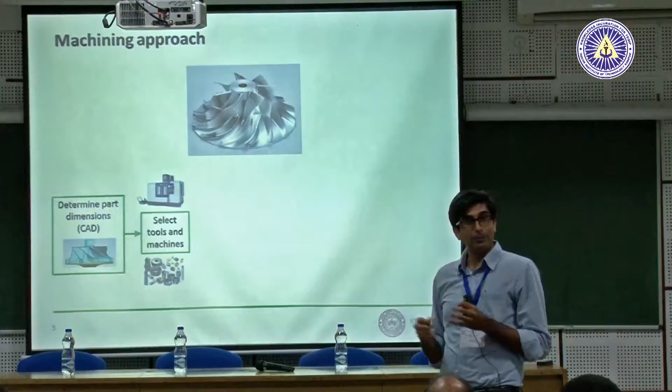Typically you start with a CAD model of this geometry that you want to build. Depending on that CAD model, and depending on what kind of operations you want to perform, you'll select tools. It might be drilling, boring, milling, and so on. In milling you might have tens of tools, so you select those kinds of tools.

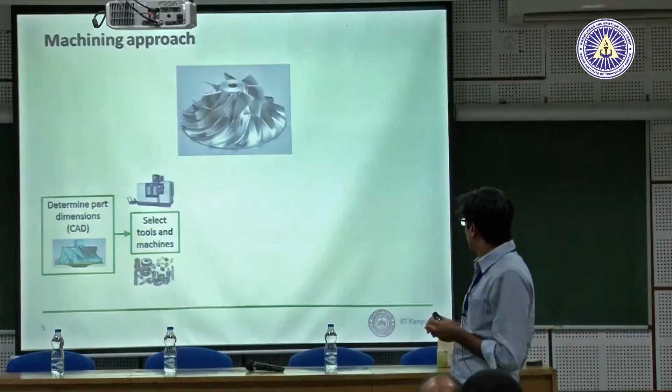Depending on the size of the object you want to make, you'll select a machine. Once you've done tool and machine selection, you'll take it to the CAM environment, the computer aided manufacturing environment, where you will generate a tool path and describe cutting parameters for each tool.

Most of this is empirical, depending on how you understand the process. Once you build that tool path in the CAM environment, you'll take it out, post-process it, convert it into G code or NC code, load it onto a machine, and cut.

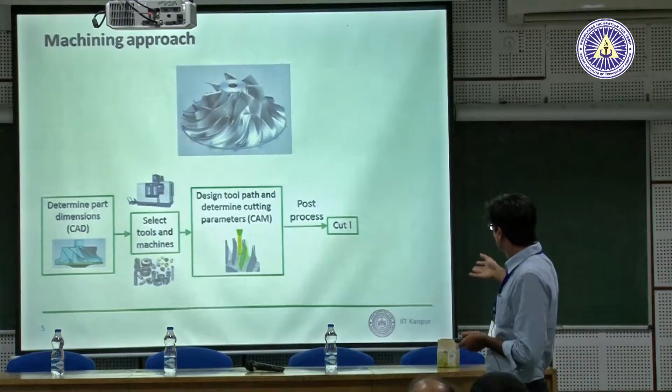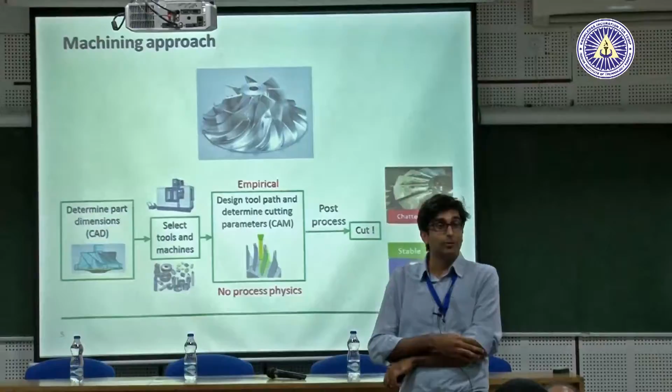If you're lucky, or if you have a lot of experience, you might be able to do this right the first time, engineering the process so the first part comes out nice and clean, as you can see in the bottom. These are blades that you machined.

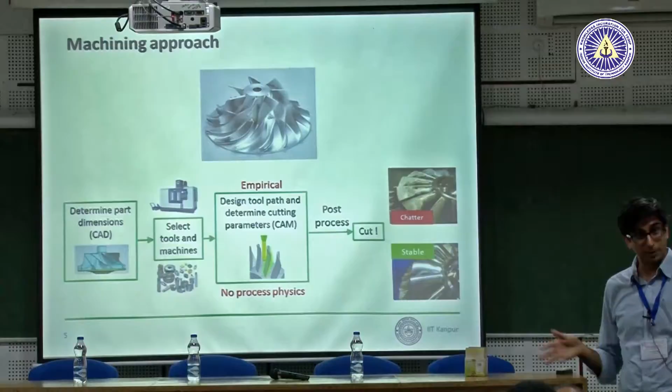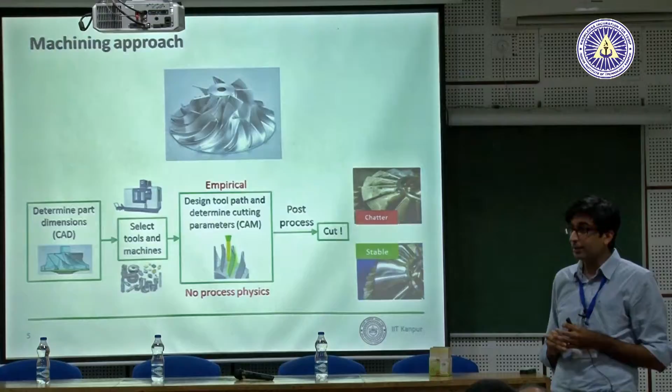But because this approach is empirical, based on vast previous knowledge or some design handbook you pick up, it's not always optimal, and it's not always guaranteed you'll make the product with whatever tolerance specifications and productivity requirements you set, in terms of optimal machining time.

More often than not, you might result in what we call chatter vibrations, which we'll talk about a little. Chatter is a very non-linear, large amplitude vibration that destroys everything. Because this approach is empirical, you'll go through several iterations to try and avoid this. It's very rare that you end up with a first-time-right solution like this.

Because you want to make multiple parts like this, you want to engineer your process for optimal cycle times in terms of productivity, as well as part surface quality and tolerance requirements. If you chatter and destroy the part, this is a very high value part—it can cost thousands of dollars or lakhs of rupees.

Typically, to avoid this you would iterate—play with your tool parameters, perhaps your tools, or your machine—trying to change one of these things to get a nice optimal cycle time with good surface quality. You'll do this in several iterations. Again, if you're lucky you might get this, but it's very unlikely.

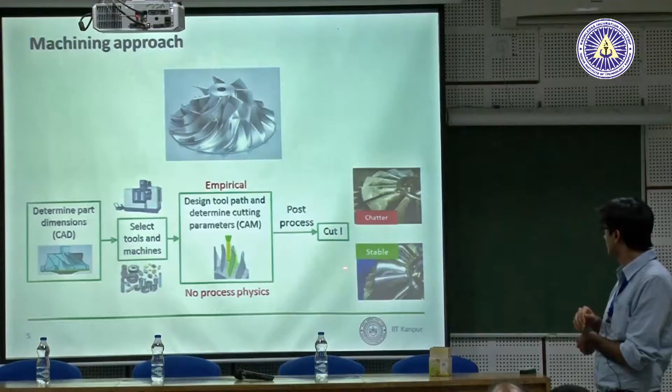So you'll probably call your tool supplier, Kennametal or somebody else, and ask them what the problem is, why is this chattering. They'll give you some input based on their vast experience: try this tool with this combination of cutting parameters, maybe you'll solve the problem.

If that doesn't work, you'll probably trouble the machine builders—call whoever is building the machines and ask them what the problem is with this machine, why is it chattering, why is it destroying my part and not giving me productivity. Again, if you're lucky you'll reach whatever you want, but more often than not, you will not.

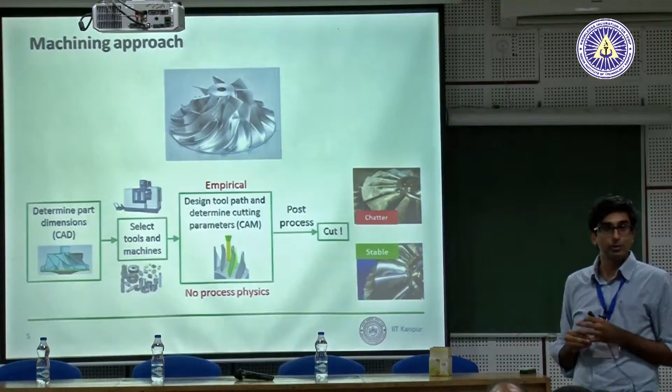So the question we ask ourselves is, what is limiting productivity? What is destroying part surface quality? That brings us to this notion of machining dynamics, which is what this workshop is about. Machining dynamics is this combination of the dynamics of machines—how machines vibrate—and the machining process, and how these things interact with each other.

Now, everything in the world is flexible. Everything vibrates, whether you like it or not—it's its happy state to vibrate. A machine is no different, because it has a source of excitation, something making it vibrate, which is the cutting force. So cutting force has enough energy inside it.

When you're cutting—whether turning, boring, drilling, or milling—there is force generated. That's how you shear and evacuate the material, how you remove material. This has enough energy in the system to excite something in the machine, making it vibrate. As you can see in this nice animation, which somebody has taken a lot of effort to build, this is the vibrating tool and this is a rotating workpiece in turning. Ideally you want this chip thickness to be constant or static.

We'll get into the details of all this later—this is just an overview. You want this to be static, but because the system is flexible and vibrating under the action of cutting forces, that chip thickness is no longer constant. You can see it's modulating.

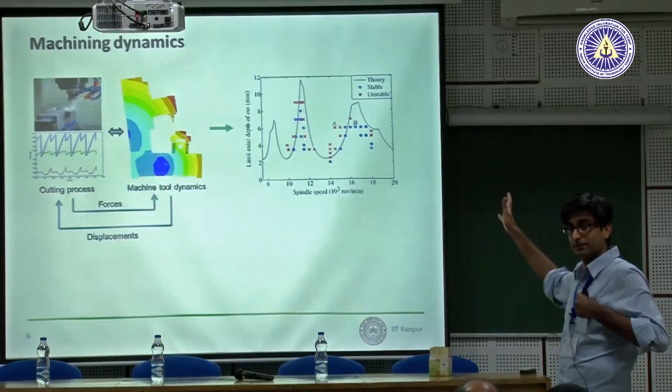So this is machining dynamics. And if we understand how these things are interacting with each other, we can construct what we call stability lobe diagrams. This is a very important and interesting piece of information. I'll just talk you through this.

On the x-axis we have spindle speed in RPM. On the y-axis, you have limiting depth of cut, how deep you can cut. These lobes that you see, or these curves, are what we call stability lobes. Everything below this lobe boundary, if you select a cutting parameter, say 2 millimeter depth of cut at 10,000 RPM, it is below this, it's going to be stable vibration.

But if you select a parameter, say at point A, which is say at 6 or 7 millimeter depth of cut with about 15,000 RPM, it is in the unstable region. So you will see, if you look at the measured force signal or microphone signal, large amplitude vibration, and you can see it destroys part surface quality—that's chatter.

You can move from an unstable to a stable regime if you understand how these things work. So if you have metrics like this, or a stability lobe diagram like this, you can go from unstable to stable, or stable to even more stable. You will see this chart over the next 5 days plenty of times, so if you've not seen this before, this is just an idea as to what we're getting into.

Now this is very non-intuitive and very difficult. So even for people like us who think we understand it, when we were setting up the labs for this workshop, we also had chatter, we also broke tools. We did not expect to see chatter when we were setting up the labs for this workshop, but we saw severe chatter, and we broke the tool and almost damaged our dynamometer too, because when a tool breaks, it's going to damage things.

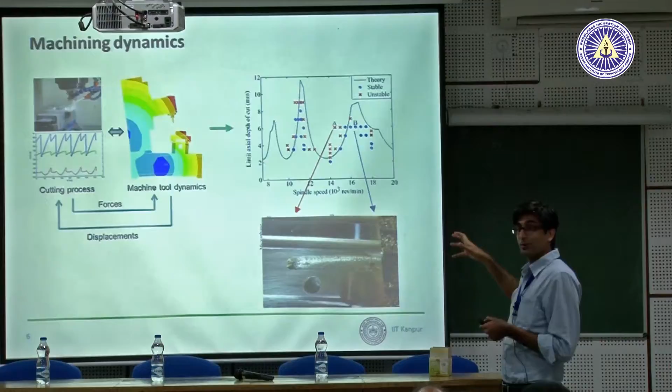So the point of showing you this is that it's very non-intuitive, very difficult to do, but hopefully we will try and equip you with the fundamental understanding of machining processes and dynamics and this interaction, so you can understand what is happening and how you use this information.

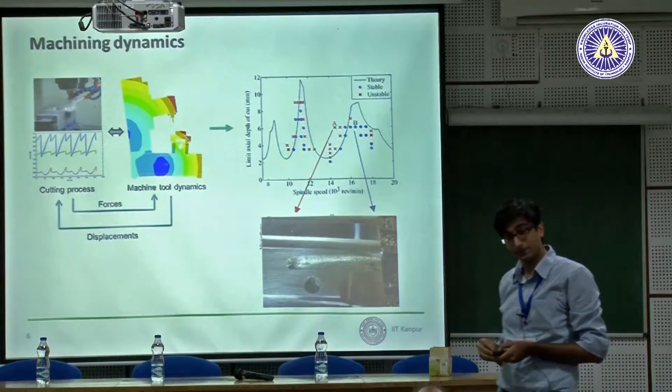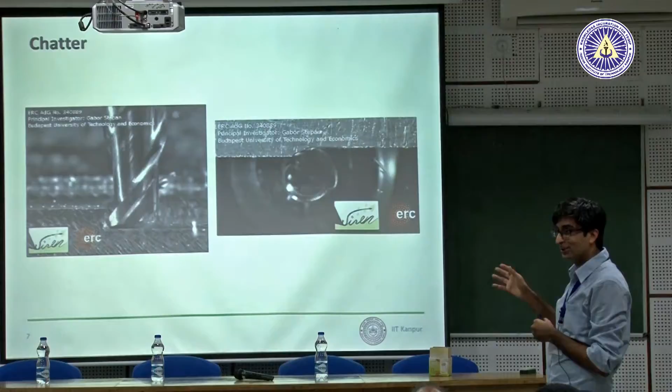All right, so this is a very nice video to show you how things chatter. My laptop is very old, and that is why it doesn't load properly, but maybe I can load it separately. This is a high-speed camera image of chattering that some of our collaborators, in fact Professor Vai's collaborators in Budapest, acquired.

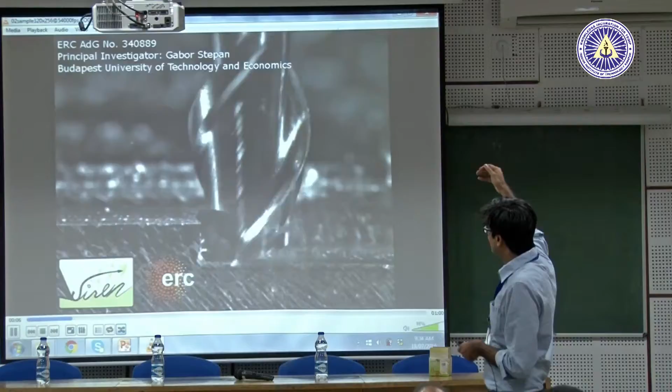This is showing an end mill—perhaps some of you might have seen it. It is showing how it is vibrating when it is not supposed to. This is captured at several kilohertz sampling rate with a high speed camera, and you can see that it is leaving these waves on the surface. It's not very clear from this view, but you can see that this is happening. This is not supposed to vibrate, but it is vibrating. Perhaps another video might make it clearer.

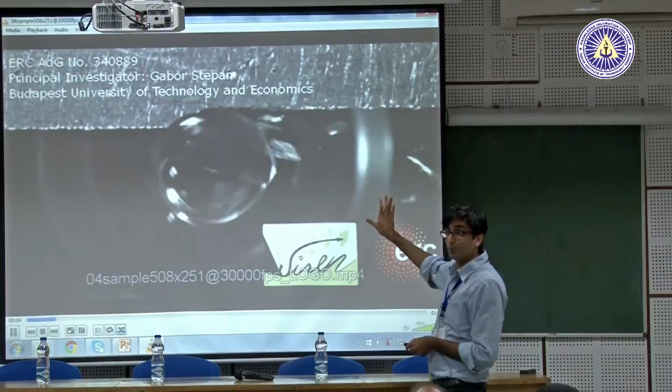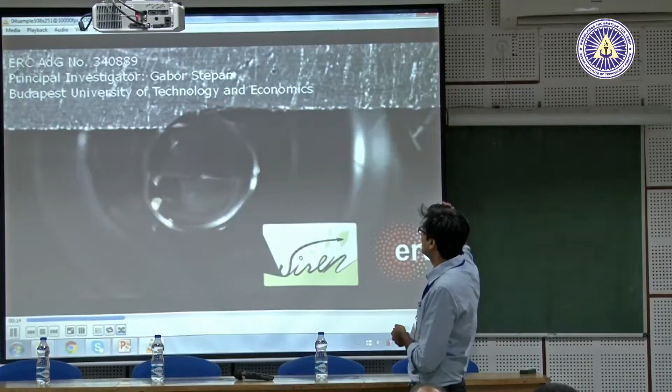So this is the bottom view. Perhaps this makes things clearer. You can see the tool is vibrating and leaving these waves on the surface, which it's not supposed to. It's supposed to be a nice clean cut. And you can see as time progresses that the vibration behavior changes. During one rotation it is stable, during another rotation it is unstable.

And this is what we want to avoid, because if you let this continue, it will damage not only your part but break your tool and spindle and so on. So what is happening behind in the background is what this workshop is about.

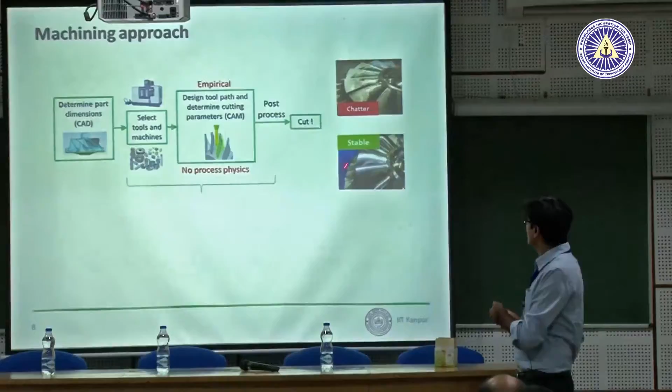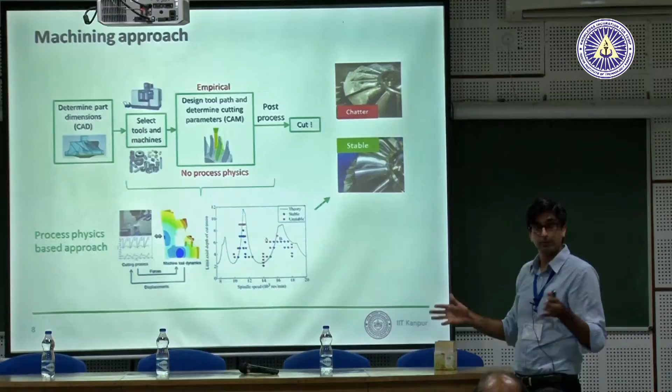Okay, so returning back. The idea is this machining approach you had of doing empirical trial and error, trying to talk to your tool supplier, machine builder, whoever, or your wisdom of empiricism, and trying to result in situations which are always stable. So what we would like to motivate is a physics-based approach to manufacturing. Understanding what is happening in the background, understanding the process, understanding the vibrations, understanding interactions, so that you can always result in a stable, highly productive, engineered process. That is one of the objectives behind this workshop.

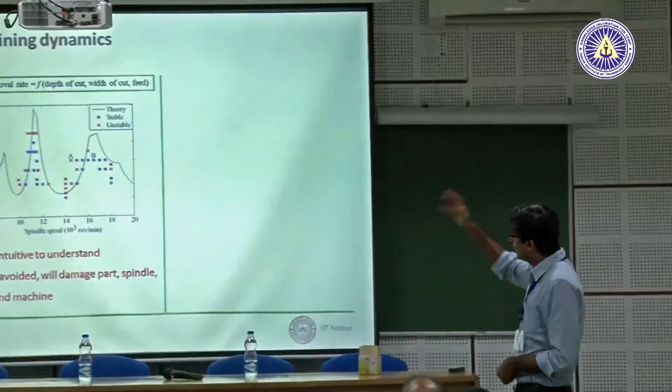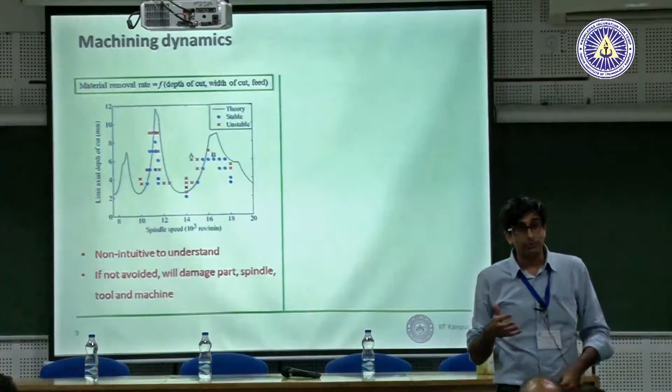Okay, like I said earlier, this is very non-intuitive. These are again the same stability lobe diagram we showed you. Region above is unstable, region below is stable. This is the boundary. Now this is so non-intuitive. For example, when you chatter, or when it starts vibrating at large amplitude, most people become conservative, so they tend to reduce cutting parameters. So from point A, most people will end up reducing the depth of cut and even reducing the spindle speed, because you're scared, you don't want to break things. And which is completely understandable.

But what we want to try and motivate is that you don't need to reduce and become conservative, you can become more aggressive. And you can see that your productivity, or the volume of material that you remove, is a function of your depth of cut, your width of cut, which is constant in this case, and feed. Feed is again a function of spindle speed. We'll talk about these things. But instead of being conservative, you can be more aggressive if you understand exactly what is happening.

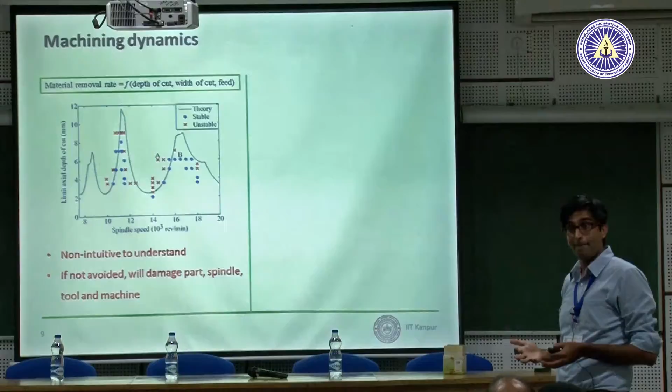And why this is really relevant is if you take two examples: this is a large aerospace structural component, aluminium, and this is a turbine blisk. This starts with a raw material weight of 2 tons, 2000 kilograms. Its finished weight is 22.7 kilograms. That's a 99% volume removal. 99, that's huge. And it's all done through machining.

And if you end up chattering, something like this costs lakhs of rupees to manufacture, several weeks of machining time to do this. So the idea is if you know something like this, you can use this information to be more productive, more aggressive, without breaking and damaging the part. Similarly in blisk manufacturing, this is a very high value part, costs several lakh rupees to manufacture. This is Inconel, also very difficult to cut. But if you can create these things, understanding the process physics behind it, you can do such things. So again, that's one of the motivations behind this workshop.

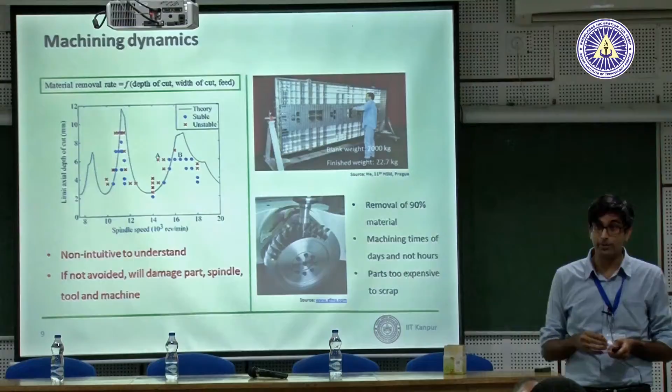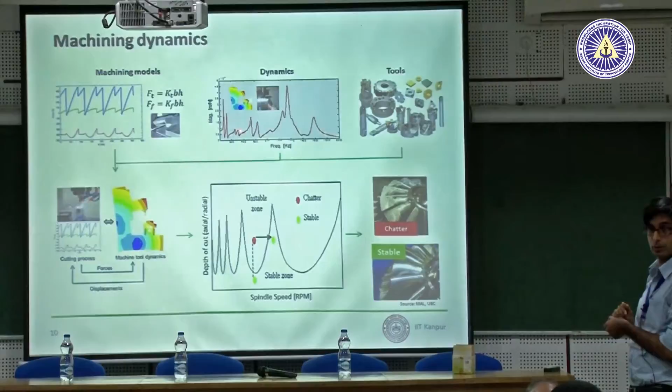All right, so there are 3 things that go into creating these process machine interactions and building machining dynamics models. There's machining process models, which we will talk about. There's the dynamics, which we will talk about, and of course, partly what kind of tools and workpiece materials that you will use to try and build these interactions so that you can always guarantee stable cutting conditions. So this is the overall objective.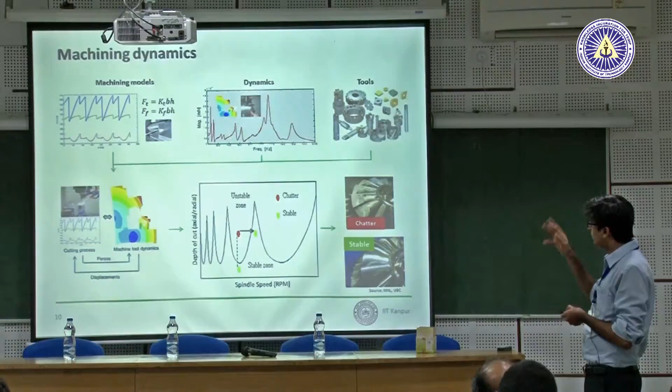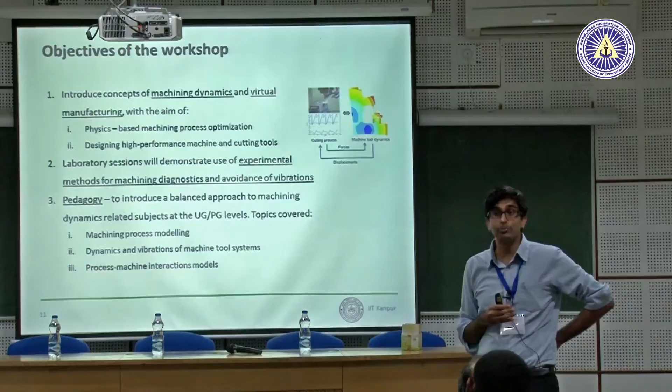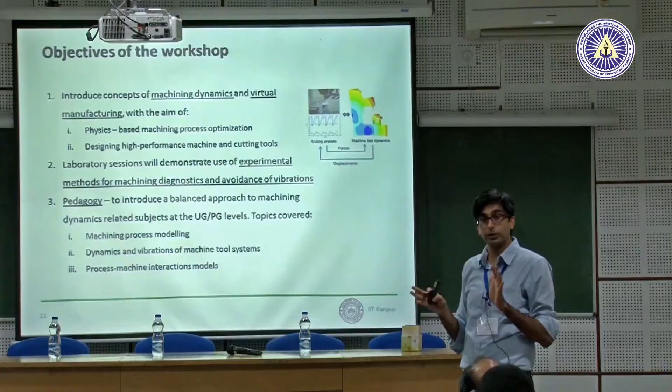There will be 3 modules, which I'll talk about a little later. But this is the grand objective, or 3 grand objectives. Firstly, to introduce to you what these ideas are of machining dynamics, with the aim of doing virtual manufacturing, so everything is process physics based, simulation based. You do these things before you go to the machine and cut. No trial and error, first time right, through understanding what is happening. And like I showed you those 2 examples, it becomes very relevant in critical applications or high volume removal material that you want to do.

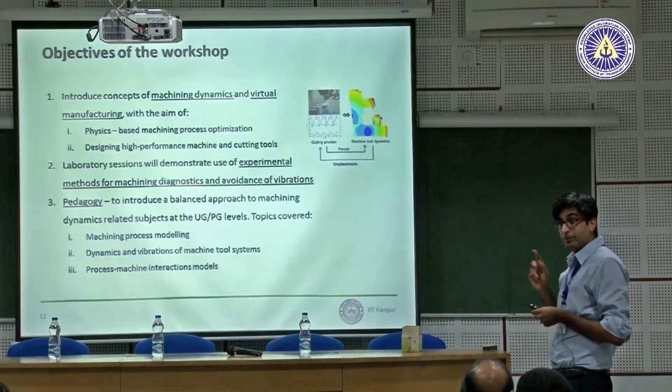We'll have lab sessions, so everything that we'll teach you in class will have lab sessions, so you will see how these things work. Of course, one of the major objectives of this is to introduce these topics to you, to motivate you to perhaps share these ideas with other people in your universities and wherever else you're coming from.

So we'll go through fundamentals of machining process modeling, we'll go through fundamentals of dynamics of machines, how things vibrate, building ground up these models, and then the fundamentals of process machine interactions. Now, all of these three things I think are very relevant, given the current environment in India.

So if you see, we are adding millions of people to the workforce every year. And in my view, the only way you can absorb these millions of people who are coming into the workforce is by giving them productive employment. And for that you need industrialization. And the backbone of any industry is the capital goods industry, which is the machine tool industry. But in India, most of our machine tool consumption or even cutting tool consumption or defense consumption is imported. We import about 75% of our requirement.

So the idea is, if you can engineer these things, if you can develop the technology here through teaching you, for you to teach your other people, to train this manpower that is necessary for this indigenization is also one of our objectives, to introduce these ideas so you can carry it forward. Because each job that you add in the capital goods industry has a multiplier effect. So one job here, one technically trained manpower that you will create when you go back and introduce these ideas to your people can have a ripple effect, or a multiplier effect, of 5 to 6. That's one of our objectives.

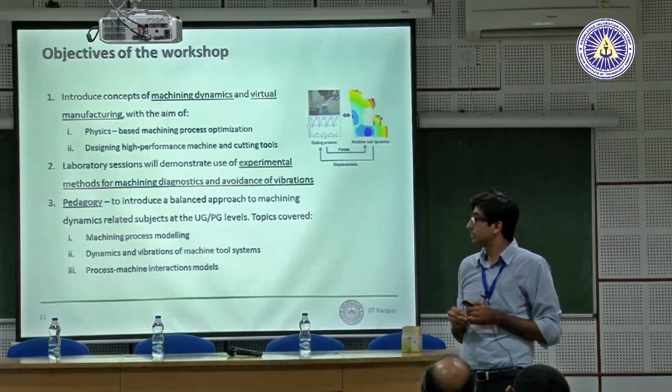All right, so this is 3 modules like I said. There's a machining process module. We'll talk about orthogonal cutting, oblique cutting, milling processes, which is also very important. We'll do experiments for each of these so you understand exactly what we're talking about. So we'll model and then experiment and predict and measure.

The same thing with vibrations. We'll do single degree of freedom systems, multi-degree of freedom systems, and we'll do experiments for you to appreciate how to measure dynamics for machines. And of course, we'll introduce these chatter models: turning, milling, and of course, micro milling. So this happens even in micro milling. It's a very different phenomenon, very different effects, but we'll talk about those also. And we'll also have experiments to demonstrate to you how to measure and avoid these things in the labs.

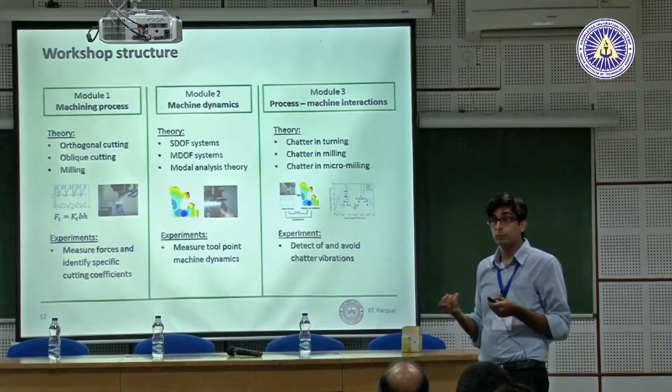We have a list of speakers, experts actually, 2 of whom are already here, for each module. We have Dr. Choudhury who will talk to us now about machining processes. We have Dr. Shakti Gupta who will join us tomorrow from IIT Kanpur, who will talk about vibrations. So he'll introduce fundamentals of vibrations. There's Mr. Mohanram, who's from the Indian Machine Tool Manufacturers Association in Bangalore. He is the senior scientific advisor to the government. So he will talk a little about industry perspective and what they need. Perhaps that also might be relevant.

And of course, the main focus is process machine interaction. So that's where a bulk of our speakers are. There's Dr. Wahi, who's already here. There's Dr. Ramesh Singh, who will join us from Bombay. He'll talk about micro milling. There's Dr. Ganguli from IIT Delhi, who will talk about control of machine tool vibrations. There's Dr. Ramkumar, who will also talk about sensors and actuators for machines. And there's of course Dr. Jin, who's an expert in micro milling and dynamics of micro milling. He'll also be here.

At the risk of sounding immodest, I would say that this pool of people is like an ocean. And what information you want from them is up to you. If you come with a spoon to collect information, it is up to you. If you come with a mug, it is again up to you. Or if you come with a pump, information is limitless. So feel free, not only limited to machining dynamics, but if you want to talk to anybody else about anything else, please feel free. You're here to try and build that association also. And I think everybody is available all the time.

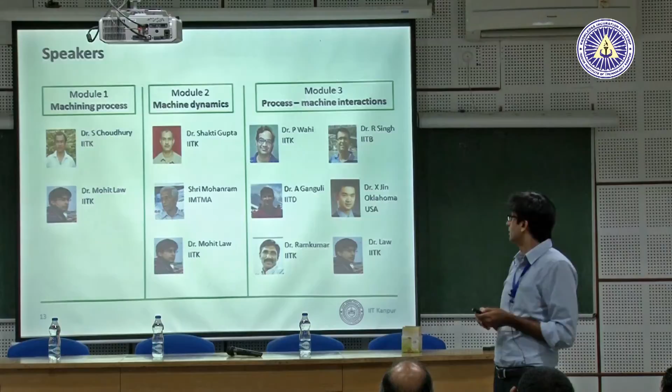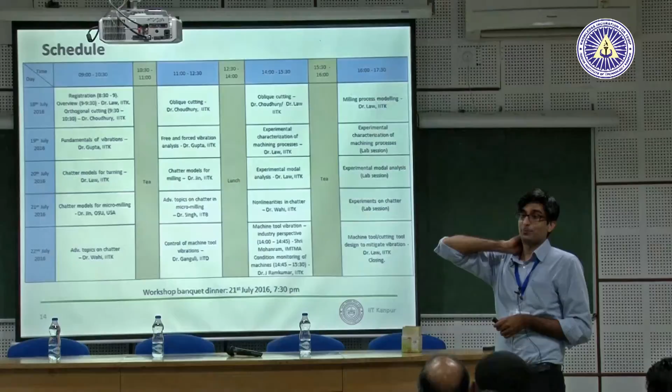This is an overview of the schedule. I think everybody already has a copy of this. Like I said, it's going to be very intensive, very math heavy. Everybody has notebooks? But like Professor Upadhyay said, everything is video recorded. So even if you don't take notes down, you can go back home and you can watch these at your leisure. And we encourage you, in fact, not only to watch them but also share them.